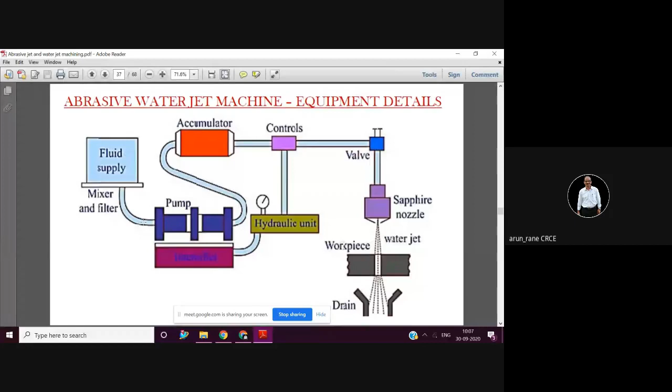So this is what the water jet machining is. So you have abrasive powder and high pressure water supply.

Hello. Hello. Hello.

So in abrasive water jet machining, you have to be very clear - it is abrasive water jet machining. So here we are using mechanical energy of water and abrasive.

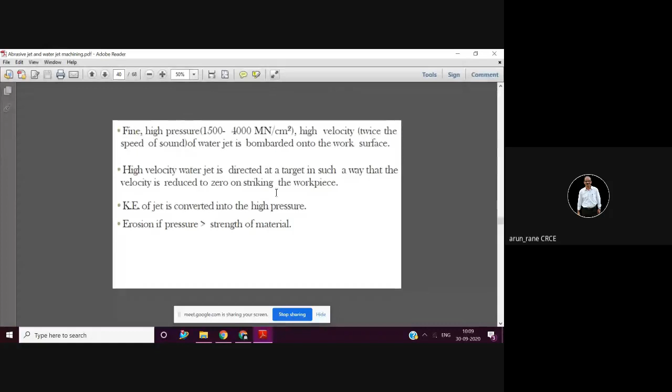So kinetic energy of the jet is converted into high pressure. The pressures are so very high, and that's why you need intensifier or accumulator.

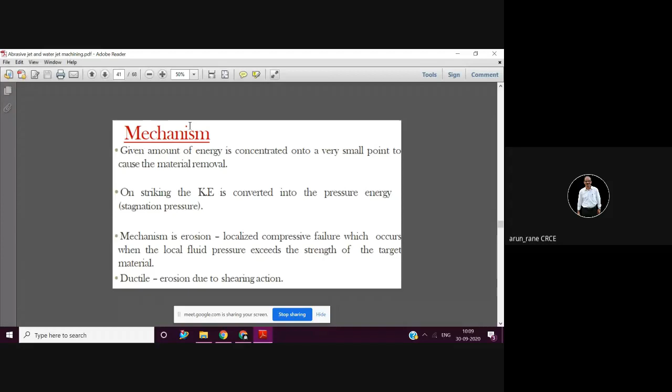So the pump pressures are as high as 200 to 400 megapascals, that is around 2000 to 4000 bar. The orifice diameter is around 0.1 to 0.3 millimeter diameter through which the water comes out.

And since the orifice diameter is very small, the resulting kinetic energy is tremendous - that is 1000 meter per second. So look at this picture.

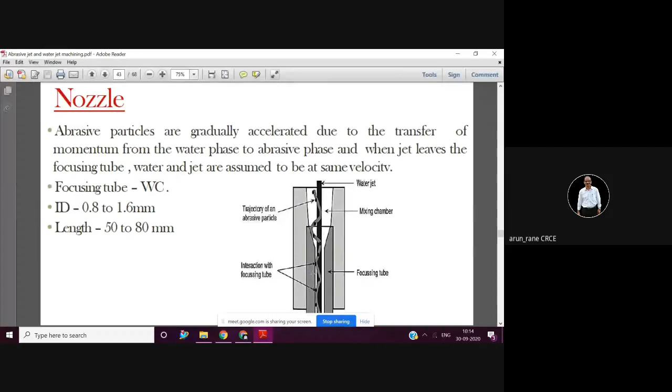This is what the internal construction is - this is actually not required from examination point of view. So you have inlet water, then you have abrasive - the aluminum oxide or silicon carbide. Then abrasive is mixed with the water, and it has a tremendous kinetic energy because this diameter is very small. And then abrasives are directed, and the erosion takes place as the kinetic energy is converted into pressure energy.

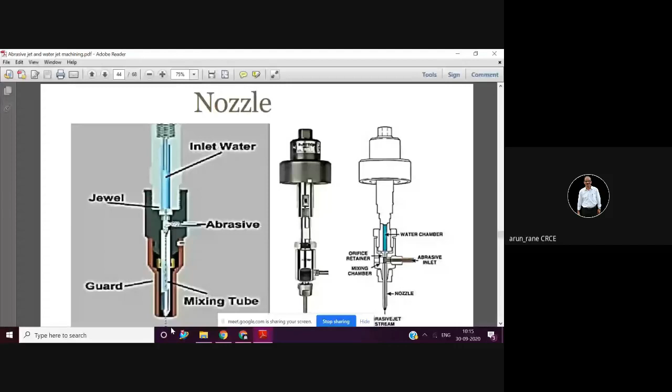Then again, this is not so important from examination point of view - that is indirect pumping and bypass principle. You have to just write that water is mixed with the abrasive and it is directed toward the workpiece.

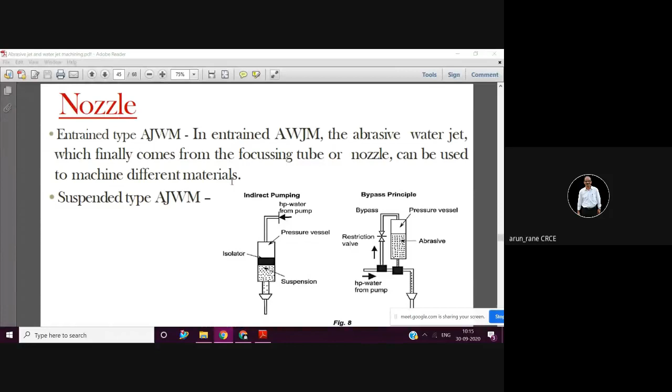These are the parameters.

So your orifice is made up of tungsten carbide or sapphire. Sapphire is always preferred because it has good wear resistance.

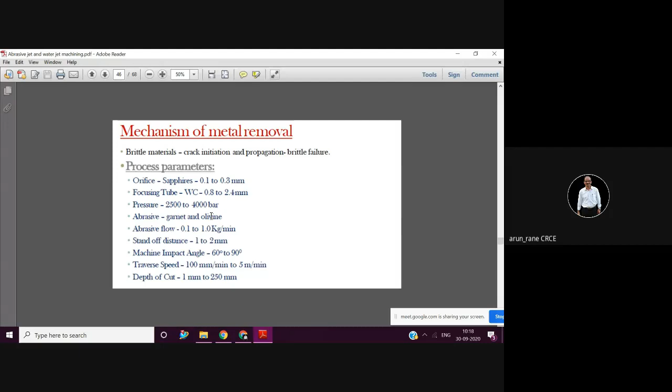These are the applications of abrasive water jet machining: paint removal, cutting soft materials, cutting frozen meat, milling, cutting, pocket milling, drilling. We are concerned about this cutting, pocket milling, and drilling.

Advantage of abrasive water jet machining is that it can cut any material, whether it is ferrous, whether it is non-ferrous, whether it is glass, whether it is steel, whether it is hard, whether it is soft. It is the biggest advantage.

Another advantage is that there is no heat generated. Yeah, the finish is good. So these are advantages you have to remember and write in the exam.

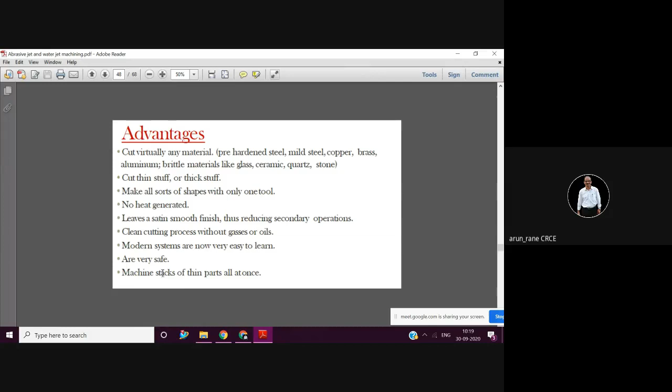It is faster also. It can be used to produce the prototype, that is models, very efficiently.

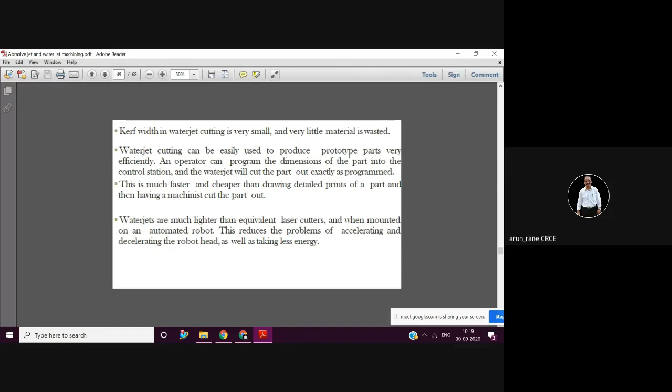Disadvantage is that economics - that is the cost is high.

Sometimes the very hard material is difficult to cut. Then equipment cost is very high. And then if thick parts - means more than 200 mm - is difficult to cut.

So that was about abrasive water jet machining. Nothing great about that. You have the diagram - that diagram itself will give you 2 marks.

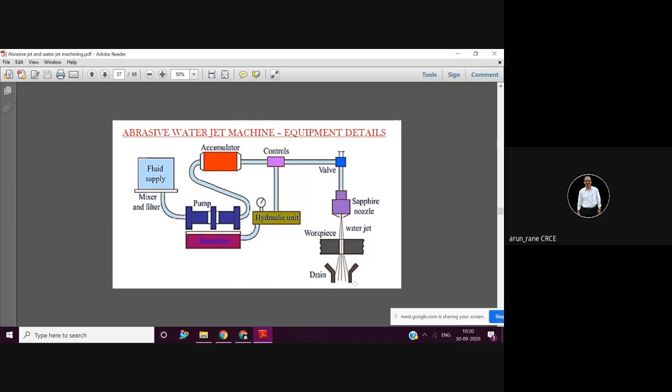And then in description you have to write the working of this, how it works, nozzles, etc. And then advantages and disadvantages. So for 3 marks, that much description is enough. Totally it will be 5 marks. So better be short and sweet.

Then there are other non-conventional processes, that is electron beam machining and laser beam machining. Shortly, it is called as EBM and LBM. EBM stands for, that is the standard abbreviation, electron beam machining and laser beam machining.

So, as the name suggests, in electron beam machining, the machining is done with the help of high-speed electrons. You know the speed of the electrons - electrons travel with the speed of light, 3 into 10 to the 8 meters per second.

And laser is nothing but, this also you are aware with, the property of the laser is that it doesn't get scattered. It travels in a straight line, like our pointers for presentations.

That's a laser. And you must have played in your childhood also - in the sun, you take a magnifying lens, and you converge the sun rays. You direct it on a paper, and the paper is burnt. So that is the sun energy, light energy - that is nothing but a laser. Or if you direct that sun rays on your skin, the skin also gets burnt. So that is nothing but a kind of machining or a kind of erosion which is taking place.

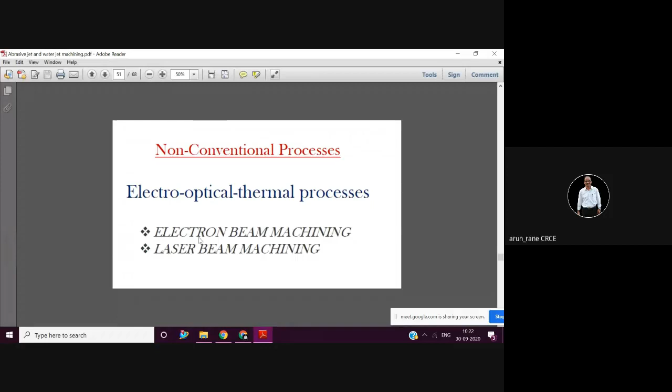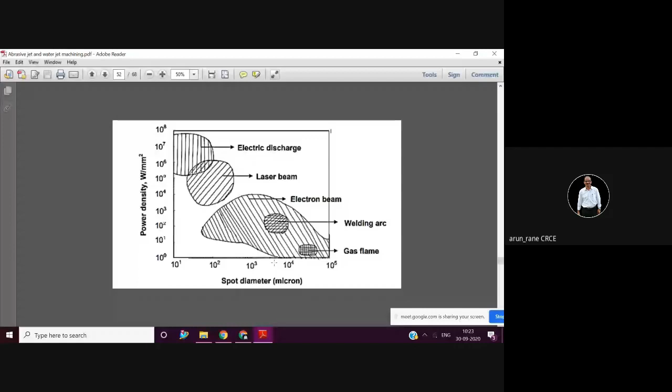So here it is a comparison of three non-conventional machining processes. One is EDM, that is electric discharge machining, then laser beam machining, and then electron beam machining. EBM and LBM can be classified under thermal processes, because of the heating.

But what happens here? Electrical energy is used to generate the electrons, in case of EBM, and photons in case of laser beam machining.

You must have learned in 12th in semiconductor physics about laser beam machining and electron beam machining.

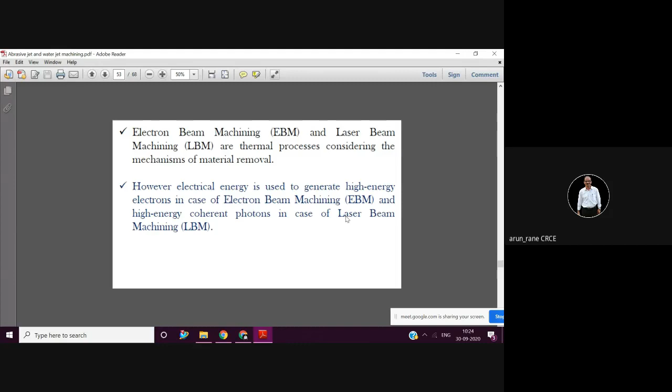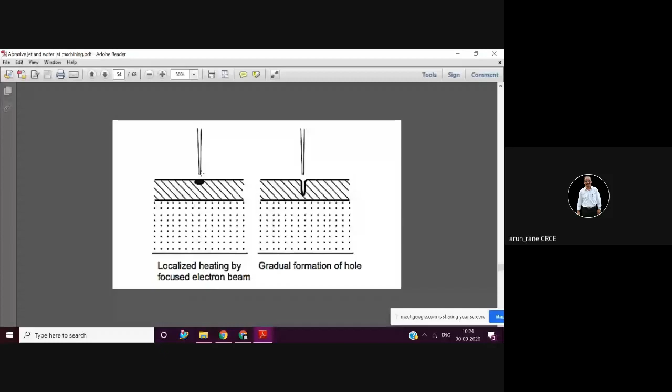But it is very slow, the process is very slow. Then you need to have auxiliary support. This is what your workpiece is - you need to have auxiliary support below.

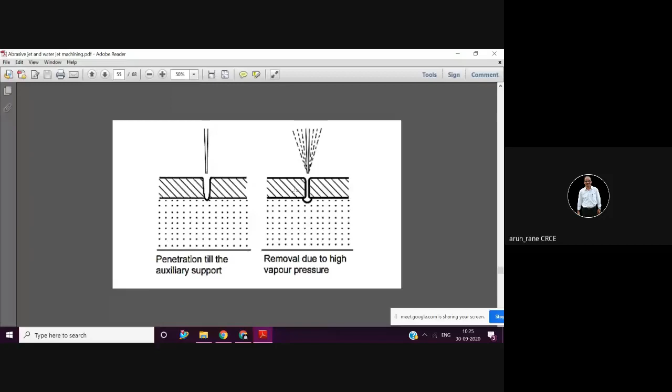Removal is due to vapor pressure as well as due to high velocity electrons. This is how the working is. Just quickly go through this.

Why is the equipment cost high? Because EBM is required to be carried out in vacuum. If it is not in vacuum, then electrons which are traveling - like suppose if there is a medium, air medium - the electrons will interact with the air molecules. And when they interact with the air molecules, they are going to lose their energy. And when they lose the energy, that means cutting will not happen.

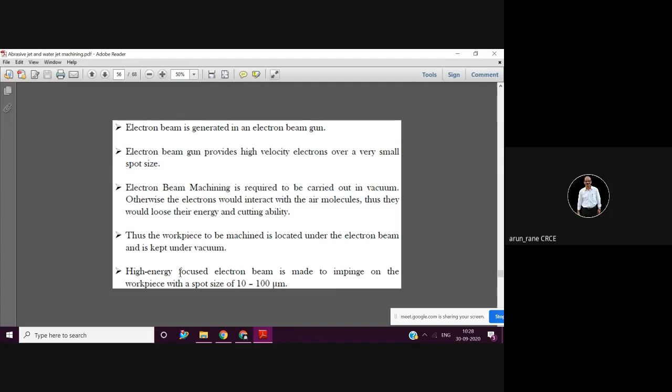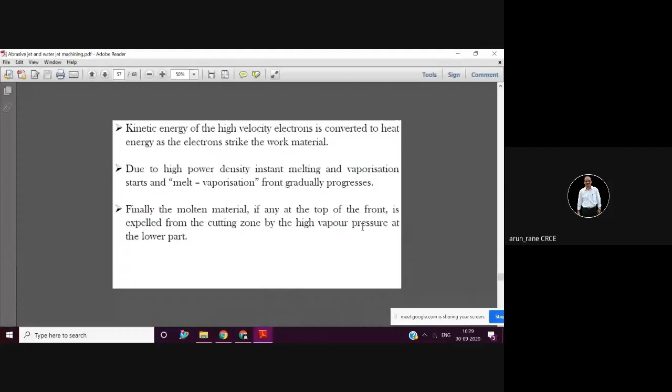So now in water jet, the pressure energy was converted into kinetic energy. Here, the kinetic energy is converted both in electron beam machining as well as in laser beam machining, and then vaporization takes place. And then you should have a provision to remove the molten material. So that again comes under equipment cost.

Basically, electron beam machining is used for drilling holes, very small holes. And you know how the electron beam can be moved, and that is what is called the maneuvering, under the influence of deflection coils. You must have studied in your semiconductor physics in 12th as well as in engineering physics too, under optics, how the electron beam can be deflected to the desired position and can be drilled.

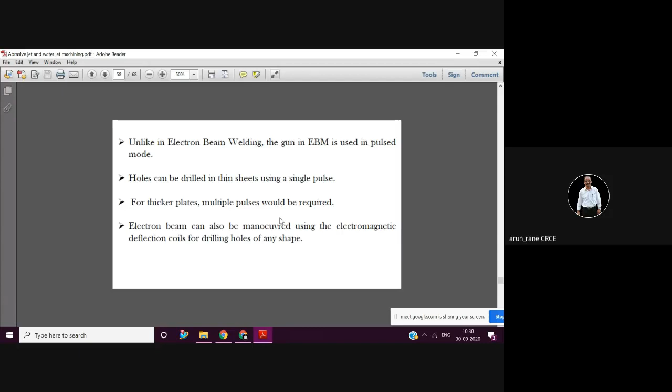This is what the equipment is, and this diagram you need to draw in electron beam machining because there will be two marks for that, if it is a 5 marks question. Sometimes 10 marks is also asked, but definitely not for EBM or EDM, electric discharge machining, or for wire cut machining.

This is our normal EBM setup where the electron beams are generated. You have some idea about this.

So you have deflector coils and magnetic coils here down to deflect your electron beam at the desired position, the same principle as your TV, the television set. You have a telescope for alignment, a lighting system for alignment of the electron beam.

This entire assembly is kept in a vacuum, and the vacuum in this chamber can be read from the vacuum gauge. Generally, vacuums are measured not in bar or kg per centimeter square, but in millimeter of mercury, or another unit called torr. Generally, vacuum is measured in torr or in millimeter of mercury, not in centimeter of mercury. So you have one port for mounting the vacuum gauge, and one more port for the diffusion pump to create the vacuum.

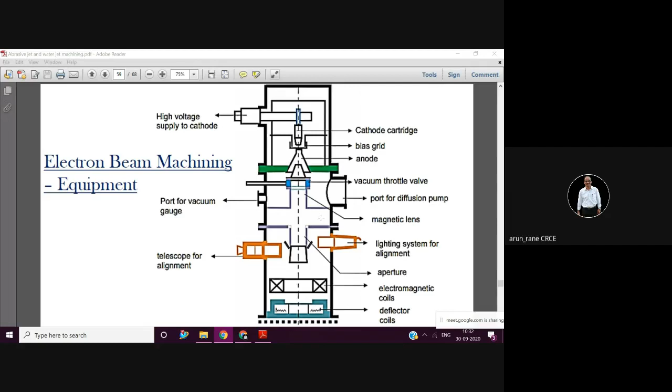So that is what is called the gun, the electron beam generating gun. Here are the free electrons. Since the electrons carry negative charge, they will be attracted to the positive, which is nothing but the anode. And obviously, electrons will come out from the cathode.

This is just an explanation of what has been told. If you want to generate the electrons, the cathode filaments are heated, and the temperature is around 2,500 degrees Celsius. This type of emission is called thermionic emission of electrons.

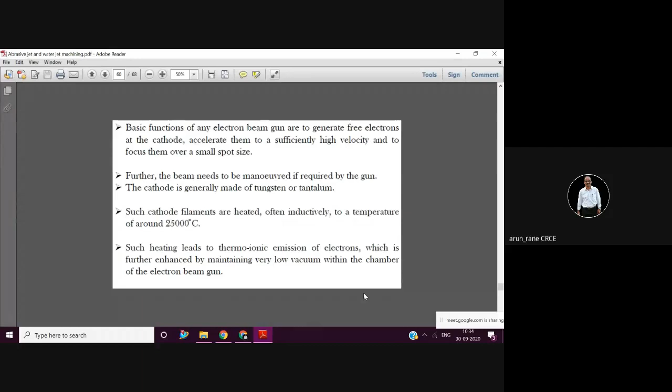The cathode is connected to the negative and the anode is connected to the positive, so that electrons will be attracted to the positive electrode, that is the anode. In the bullet form notes, you need to write the important points: the negative bias and positive bias, that is, the speed of the electrons will depend upon the voltage difference between the cathode and anode.

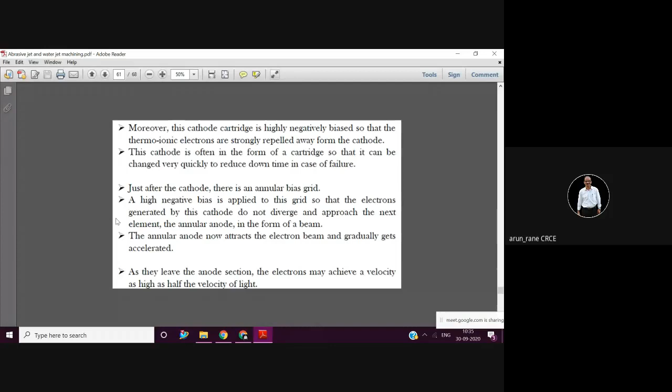If you go on applying positive voltage, the speed will increase. And if you go on reducing the voltage, and if it goes to the negative side, there will be a repulsion, and at a particular voltage, the speed of the electrons can be made zero. This is what you have learned in semiconductor physics. That is what is called biasing.

Once the electron reaches the anode, it is passed through a series of magnetic lenses and apertures. The purpose of the magnetic lens is to reduce the divergence. It should not scatter; it should be focused on the particular spot where machining is required. If you want to improve the quality of the electron beam, the aperture and magnetic lenses play an important role.

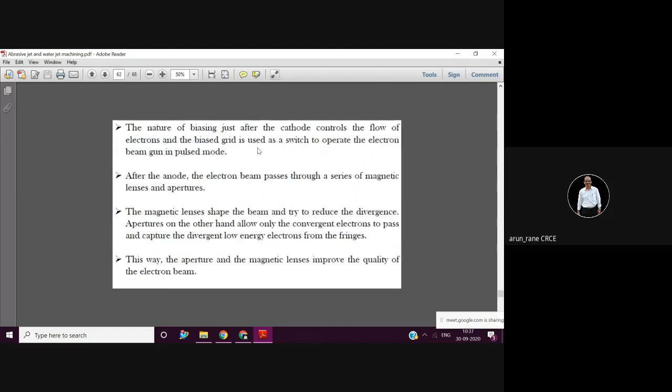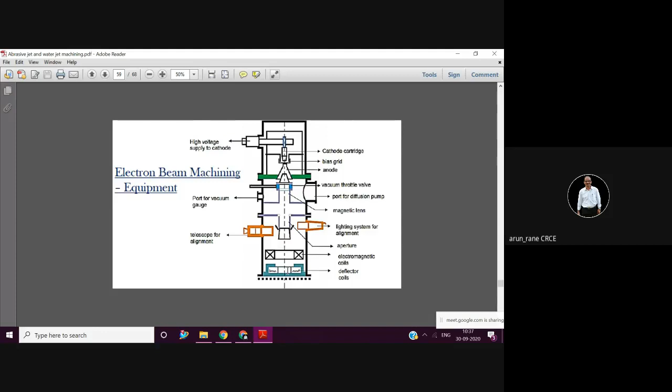So the final section is the electromagnetic lens and deflection coil, here. The electron is generated when you apply high voltage, and then it is finally allowed to strike the workpiece from this portion. So it comes out of the electromagnetic lens and the deflection coil, and is directed to the desired spot, where, because of the speed and the heat, the material is eroded.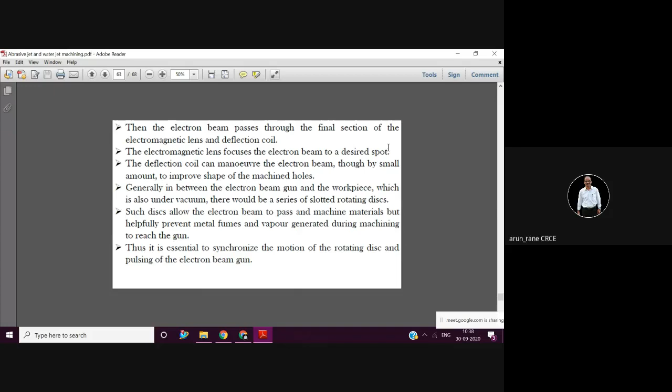Generally, it is used for drilling holes. That can be called a limitation of electron beam machining. Through and through holes are fine, but sometimes blind holes and complex shapes become difficult to machine by electron beam. And of course, you have a dedicated computer—most EBMs are CNC, computerized control.

Working of the diffusion pump is not important from an examination point of view. What will be asked is the principle of working of electron beam machining. So again, 5 marks: diagram for 2 marks, and the description will include a little bit about the equipment, advantages, disadvantages, limitations, and that is sufficient.

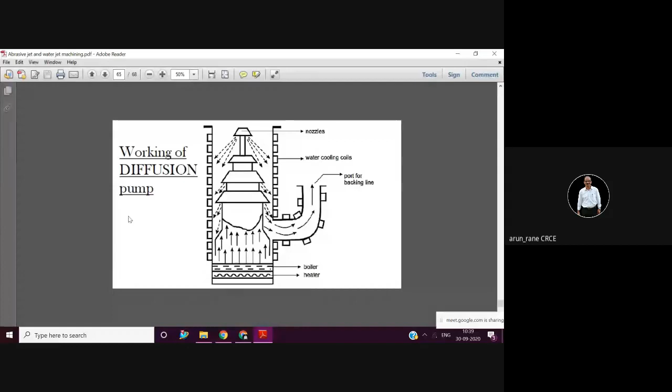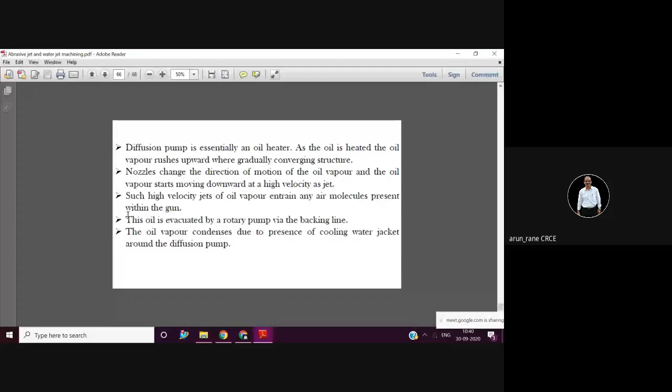If you want to study, you can go through it. This is again important: electron beam process parameters—what is the voltage, what is the current, the pulse duration. Pulse, we are talking about a square pulse, a square train.

So the width of that square is nothing but the pulse duration, also called the on time. So the more the on time, that is, the more the width of the pulse, the more the energy per pulse, and the more the power per pulse.

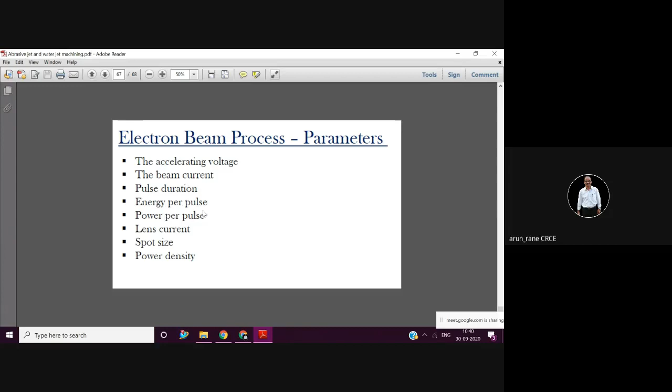So in this, we have seen electron beam machining, then we have seen abrasive jet machining, and we have seen abrasive water jet machining.

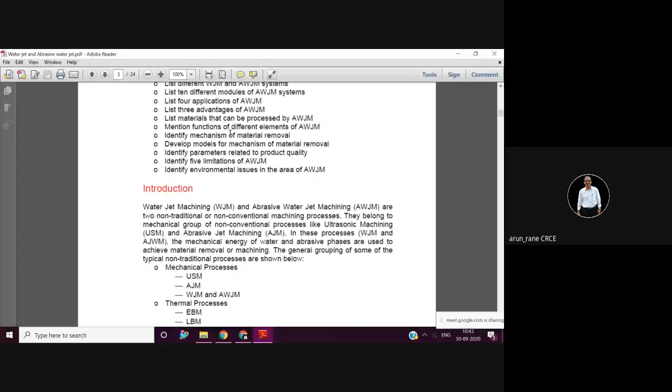Now this is how the classification is. So you can just write it down.

The classification of unconventional processes, that is mechanical processes, are classified under ultrasonic machining (USM), abrasive jet machining, which we have seen, and water jet machining or abrasive water jet machining.

Then thermal processes are EBM, that is electron beam machining, laser beam machining, plasma arc machining, electro discharge machining, and wire EDM, that is wire electro discharge machining.

Then you have electrical processes, that is electrochemical machining, then EDG, that is electro discharge grinding, and this is electro jet drilling.

EJD is not used. Then you have chemical processes, that is your chemical milling. You can do it simply with the help of chemicals, or with the help of chemical and electricity together, which is called electrochemical machining.

This is your electro discharge grinding. Normally in our surface grinding or cylindrical grinding, current is not passed through the wheel. In electro discharge grinding, the current is passed through the wheel.

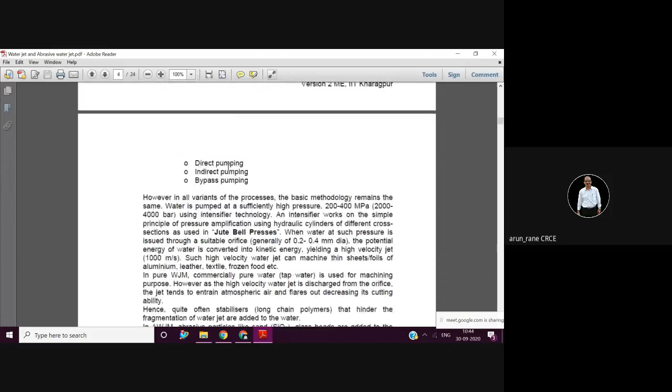So just write down this quickly: mechanical process, thermal process, electrical process. In that, you skip EJD, and chemical process.

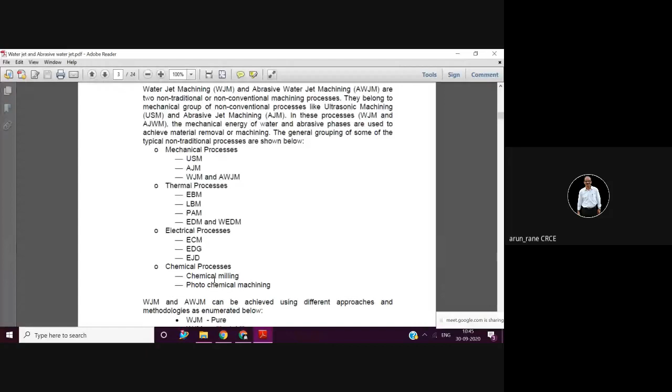So please write down this, because later on you may forget.

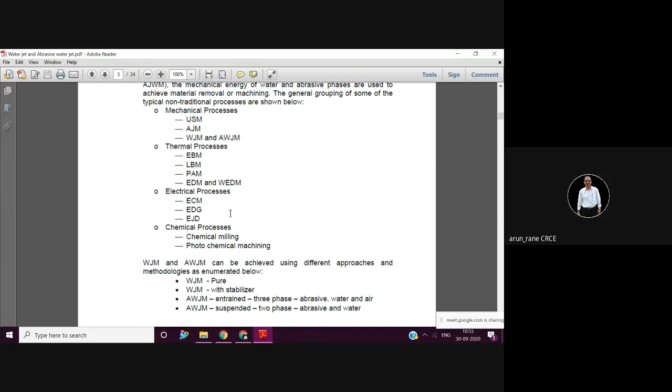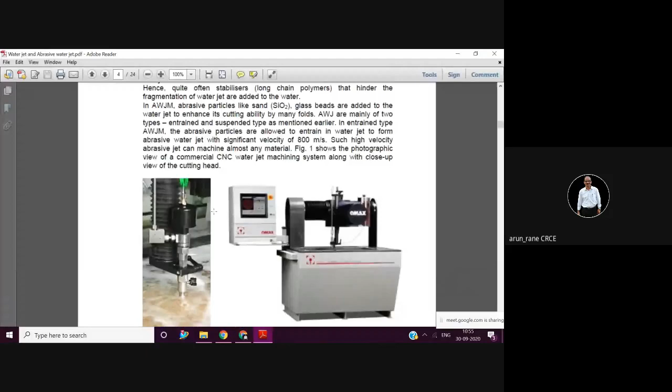See, this is how typical water jet machining looks. Now remember, this is not an abrasive water jet, this is just a water jet machine. So it doesn't have abrasives here.

So it looks like your milling machine only, like your vertical milling machine, or like your CMM, that is coordinate measuring machine, inspection machine. Instead of a tool or milling cutter, you have your water jet. That's all, so imagine it is like your milling machine.

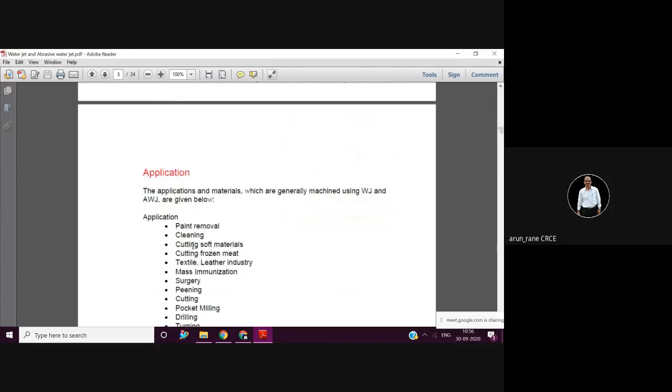Then the applications which we saw in last presentations of water jet and abrasive water jet are this: removal of paint, cleaning, but majority are drilling, turning.

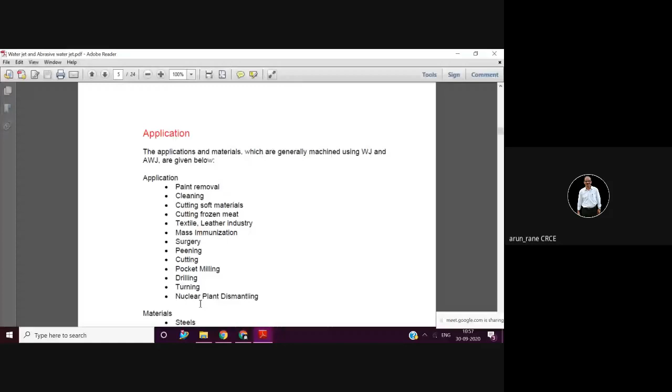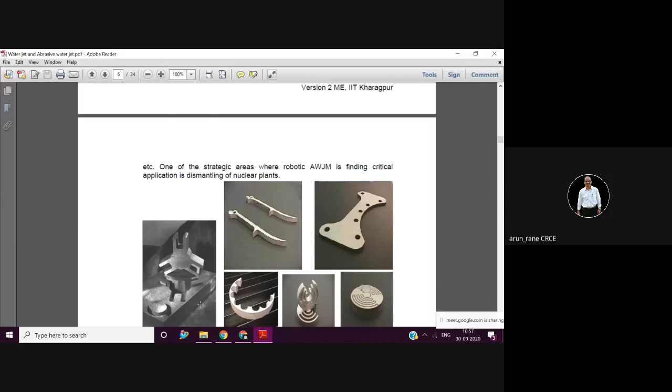This presentation is not so important from the examination point of view. So whatever I told you in the beginning, that page was important, that is classification of non-conventional processes, which you have written down. So unnecessarily don't go through this presentation.

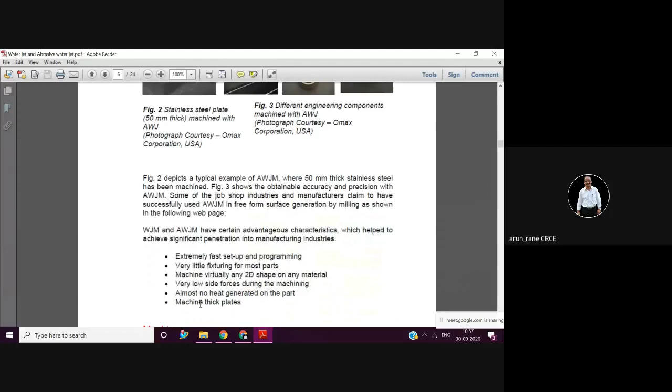These are the different components which are machined with abrasive water jet. The beauty of this is that you get a good finish.

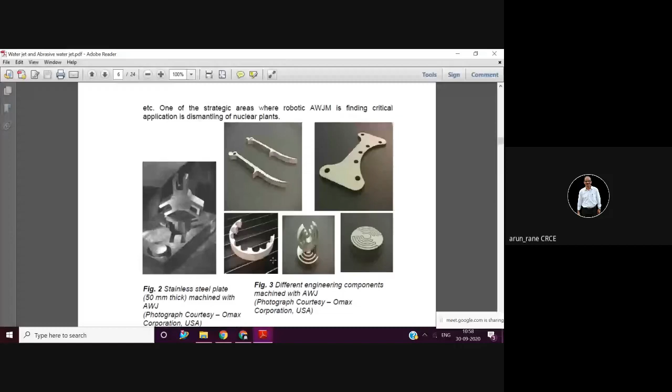Hello? These are the different equipments.

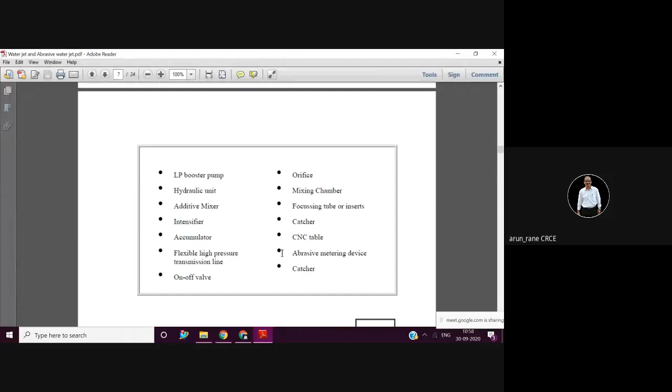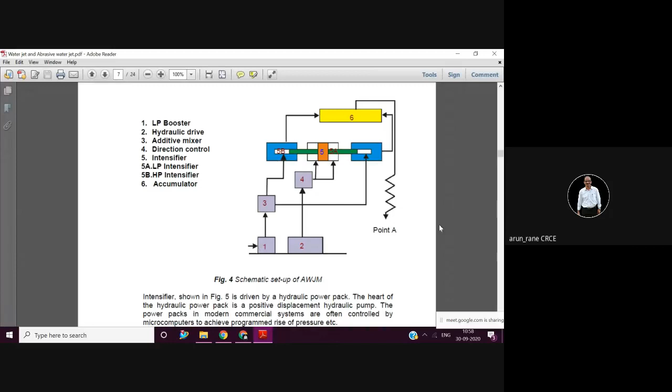This diagram is a circuit diagram. Don't draw this diagram for a short note.

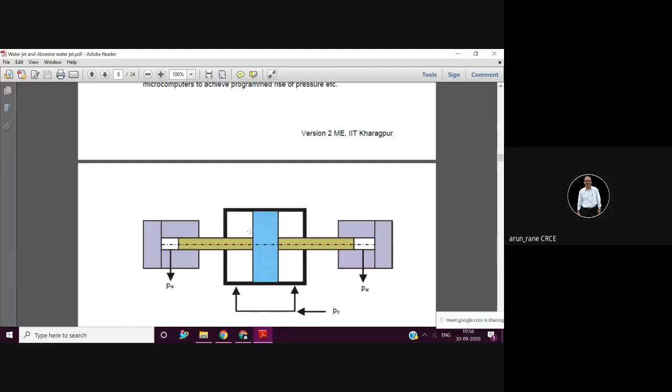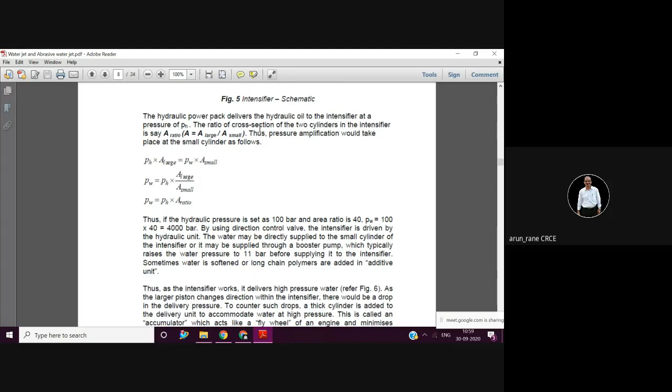Again, this is the circuit diagram, so again don't draw this. This is the principle, that is simply your Pascal's law: pressure on one side is equal to pressure on the other side. Just because of the difference in area, the pressure can be intensified or increased. That is the principle of the intensifier, and this is how you get high pressures.

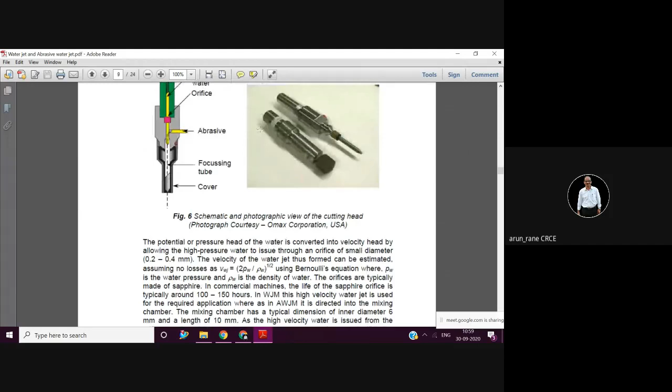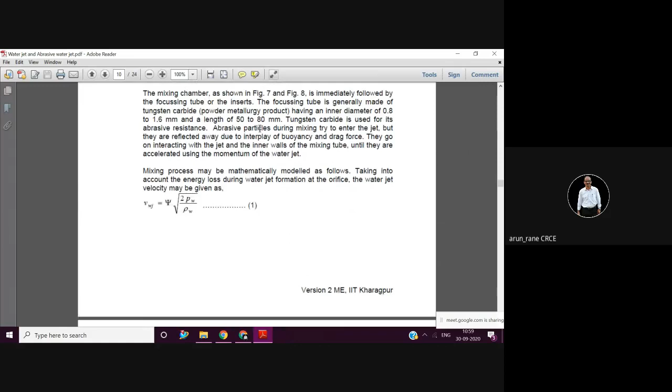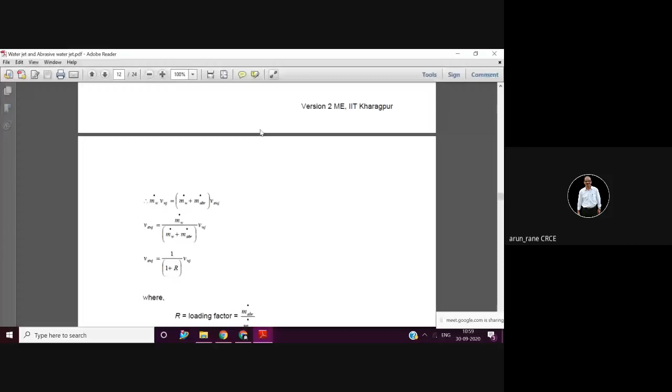This diagram we have already seen. There is a model for velocity. Again, it is not necessary to write this because these IIT people will always teach mathematically, even arts subjects they will teach with mathematics.

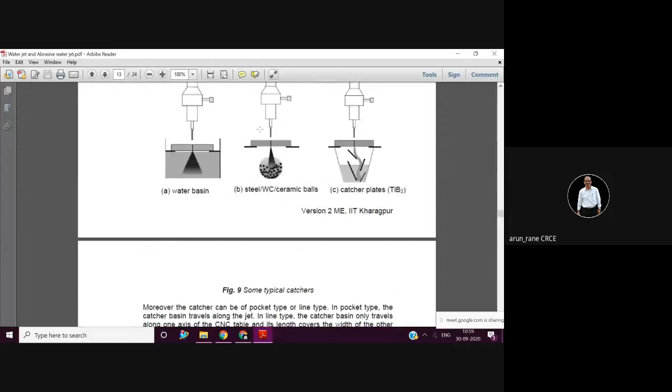But if you want to do some research, then definitely whatever important points I have picked up from this presentation are useful. The purpose of showing this presentation was just to give you a little more idea and to show you the classification.

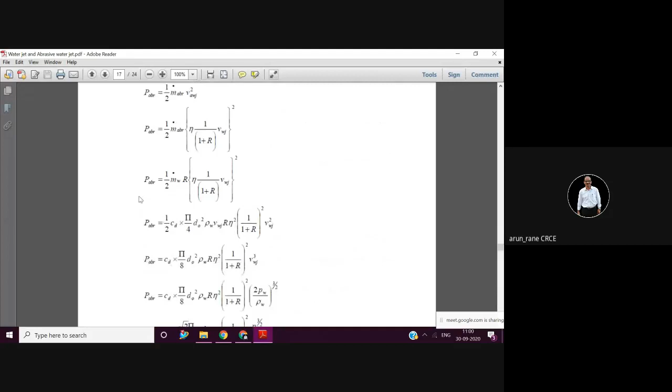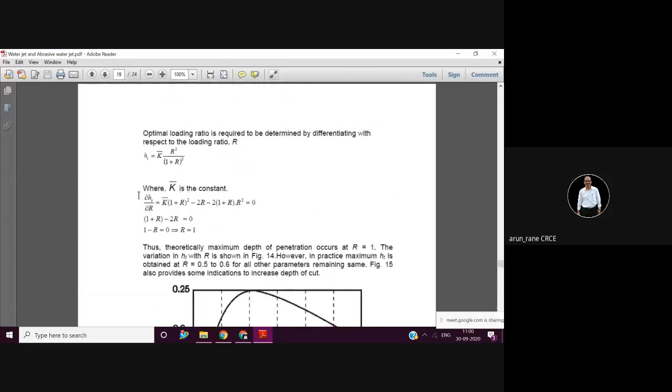This is how power and MRR, that is material removal rate, is calculated, and how the energy requirement is determined. So that also can be calculated. Then the mixing ratio and cutting ability, how does it depend?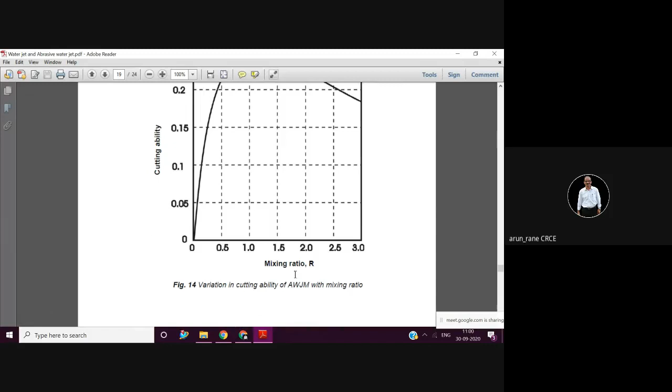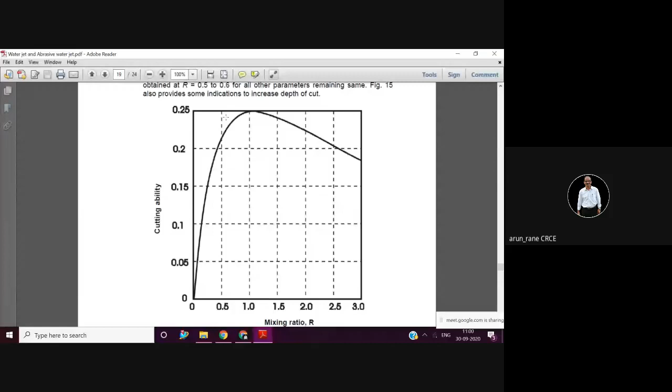Another important point is environmental issues, so you have to take care of this: recycling of water, disposal of water, and abrasive recovery and reuse. If you want to reuse abrasives, you can reuse that. So that is what is called recycling.

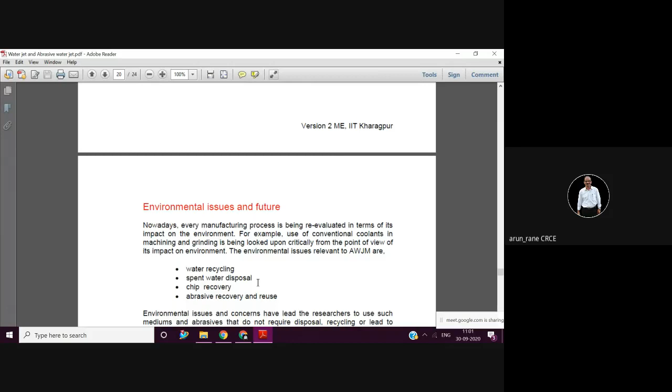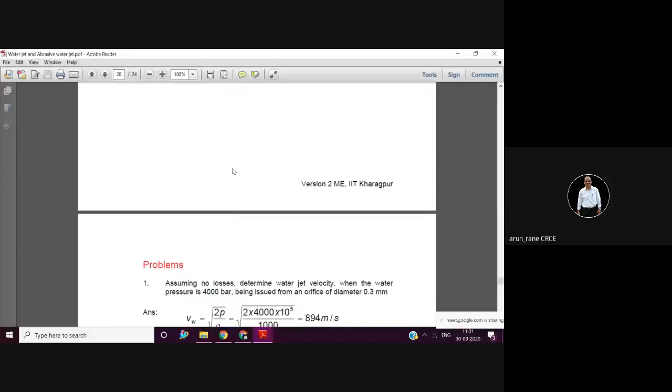So from this presentation, page number 20 is important, and the classification is important. You can also remember that you can recycle the water or dispose of the water, and you can recover the abrasives and use them again.

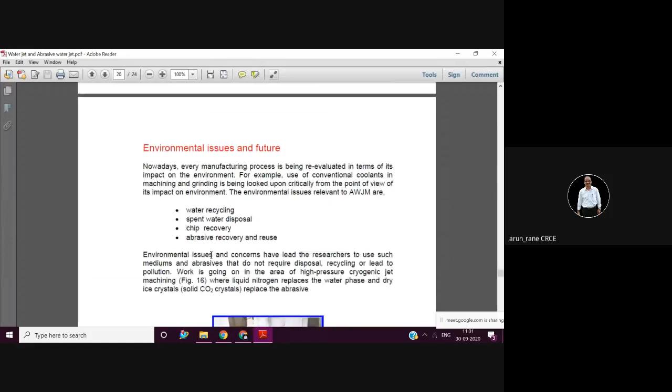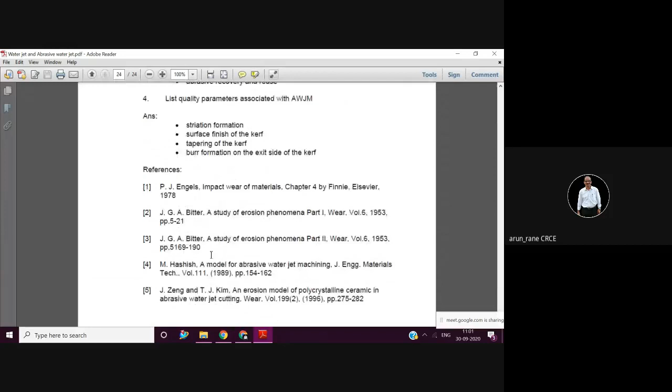And these are some problems and MCQs which are not important from the examination point of view. So we'll continue next time. Thank you very much. If you have any doubts, you can ask, otherwise you can leave it.